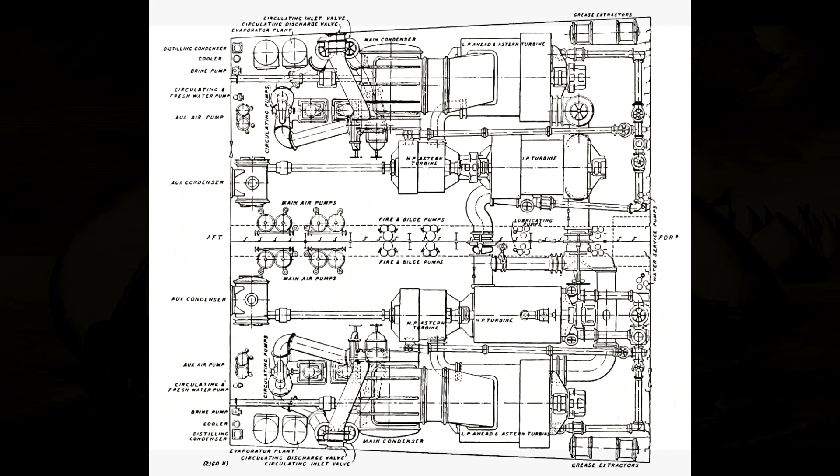So today we're going to go over some considerations you might want to keep in mind when designing your naval propulsion system. First, are you going to use steam at all? This depends on when you are designing your system, because if you're trying to design one in 1800, I have news for you, you're going to fail. It's sails all the way. However, if you're trying to do this around 1930, there are a few options on the table.

For example, you could use diesel, which doesn't involve creating steam. This brings us to our first conundrum, at least for the time period the channel covers. Diesel engines, when they exist, are more efficient. They will get you further for a given amount of fuel, but their energy density is less. If you have a certain square footage or volume to fill with some form of engine and you use a diesel system, the overall power output will be less than the equivalent steam propulsion system. So if you want speed, diesel's probably not the best bet, but if you really like range, it's probably a good idea.

However, you also have to factor in that fuel for steam propulsion systems, by the early 20th century, is available in all sorts of wonderful places. Diesel fuel in any great amount, not so much. So you might have to start thinking about taking on board some kind of fuel purification system, like the Deutschland class had. But of course that adds weight and takes up space. And if you want diesel and speed, you're going to have to devote a large proportion of your internal volume to propulsion systems. That may compromise, if you're designing a warship, the amount of armor, weaponry, supplies, crew, etc. that you might be able to fit on board.

But if your objective is purely to go a very long distance on minimal fuel, then sure, go with diesel. You could also go with a combined power plant. You could go with diesel on a central shaft, if you're the Germans, with 3 shafts, or diesel on 2 inner shafts if you're somewhat more sensible and have a 4-shaft system on your capital ships, with steam on the outboard shaft. This would theoretically give you the long-distance cruising capability of diesel and the high-speed steaming capability of steam, at the expense of a somewhat larger machinery plant than you might otherwise want.

And of course, you have to carry 2 kinds of fuel and have 2 separate kinds of engineers trained on 2 separate kinds of propulsion systems, which could be problematic. But ultimately it's all down to what you can afford and what your final objective is.

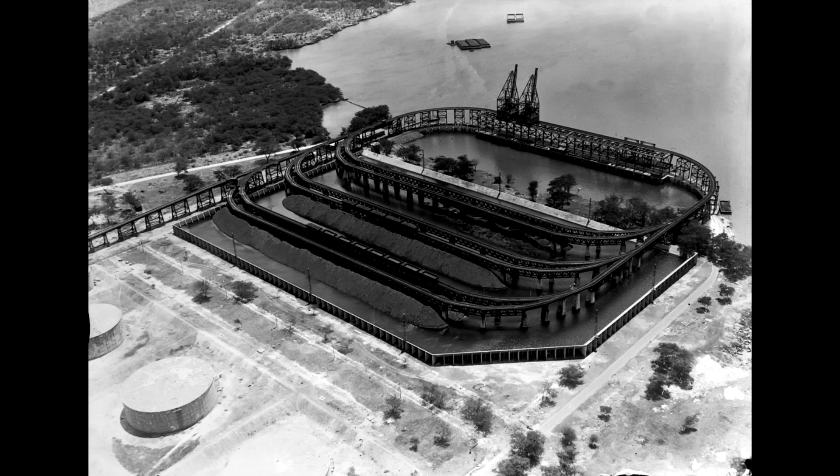Now, assuming you've chosen a pure steam propulsion system, or you're thinking about a partial steam propulsion system, you then have to think about what kind of fuel to use. If you're doing anything up to about the first decade of the 20th century, you're pretty much restricted to coal. So good luck shoveling.

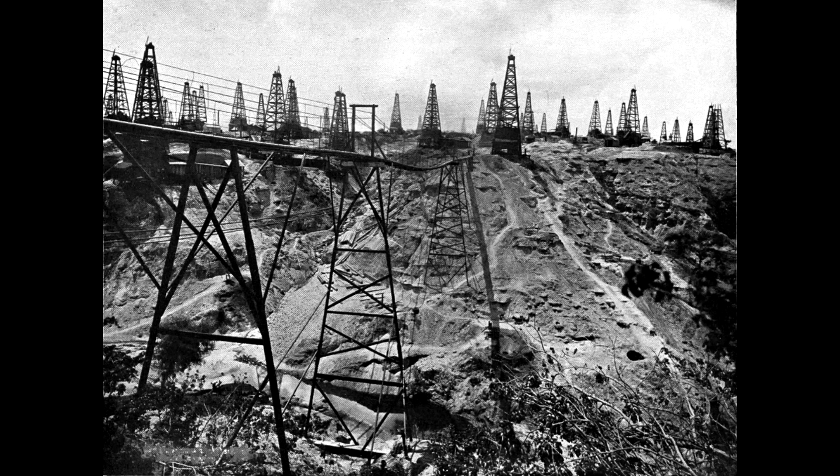However, once you get into the 20th century, you start to see the rise of mixed boilers. So you can have primarily coal, but spraying oil on there to help with burning, increasing power output. As you get into the 1910s and thereafter, you start to have more and more access to oil firing for your steam plant. Now, there are, believe it or not, some benefits to each system.

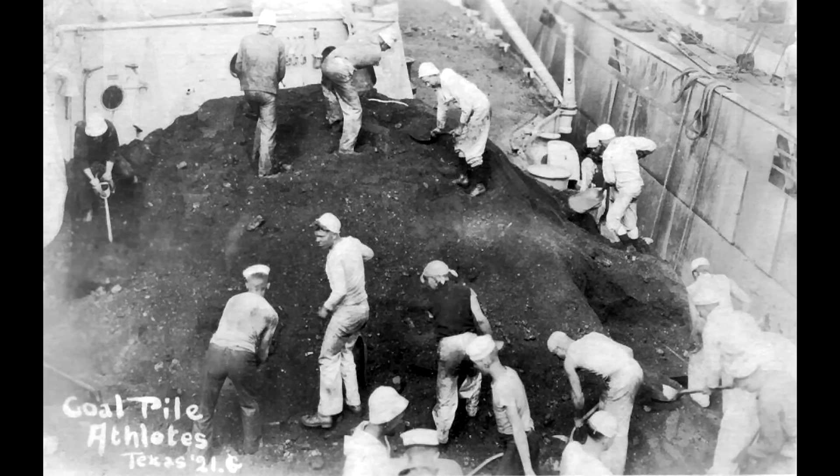Yes, pretty much everybody in various navies switched over to oil, but as the Japanese would find out in the late 30s and early 40s, oil does have one drawback. Coal, even if it's not particularly good coal, can usually be found in some way, shape, or form in most countries. Oil, not so much.

So that means you are going to be dependent on some kind of foreign overseas oil supply, unless you happen to be one of those very lucky countries that has naturally occurring oil fields, or your country is just so large that you will inevitably have some naturally occurring oil fields in it at some point. Or potentially you've gone out and nicked a bunch of other people's countries and they happen to have oil, but in those cases, you still have to get that oil back to your home country, which other nations might have something to say about.

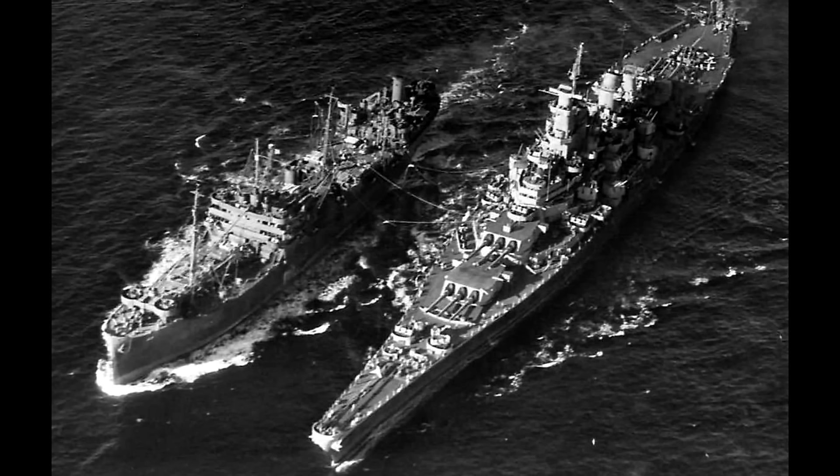But outside of the possibility of not actually having any fuel, oil is otherwise fantastic. It gives you more energy per unit of mass than coal does. It's much easier to refuel, much cleaner to refuel, which is a great boon to your crew. You don't need as many crew because you don't need stokers anymore. Although the rank is retained, the general idea of needing several hundred men to shovel large amounts of fuel into furnaces dies a death with oil propulsion.

And if you run out of oil in one of your fuel tanks, you just go, okay, well, I guess we're drawing oil from another fuel tank. Whereas if you run out of coal in one of your bunkers, it's a bit of a walk to another bunker. But of course, you have to trade that off against, well, first, the technological capabilities of your nation. Second, the potential security hazards of relying on oil from overseas, if that is how you're going to get your oil, which most people are going to.

And finally, depending on the ship that you are designing, given that oil is a little bit more expensive than coal, do you need all these performance boosts? If you're designing a particularly slow vessel that's not going to be expected to run at very high speeds for extremely long periods of time, then coal might be easier to access and cheaper. It's very rare that you would make such a decision, but if you happen to have local coal deposits and no local oil deposits or no easy access to oil from overseas, coal might be a solution for things like small escort ships.

But assuming that you've got past all of that, and let's assume you've gone with the most common choice for the 20s, 30s, and 40s, which would be an oil-fired steam system, you now get to choose what kind of engines are your lovely steam boilers going to power. Of course, in the mid to late 19th century, you have a choice of trunk engines, compound engines, and double compound engines, basically as they are invented. But again, we're going to be setting our question, apart from referencing what some of the earlier technologies were, mostly in the late 1910s and onwards, because that's where you have the widest variety of choice.

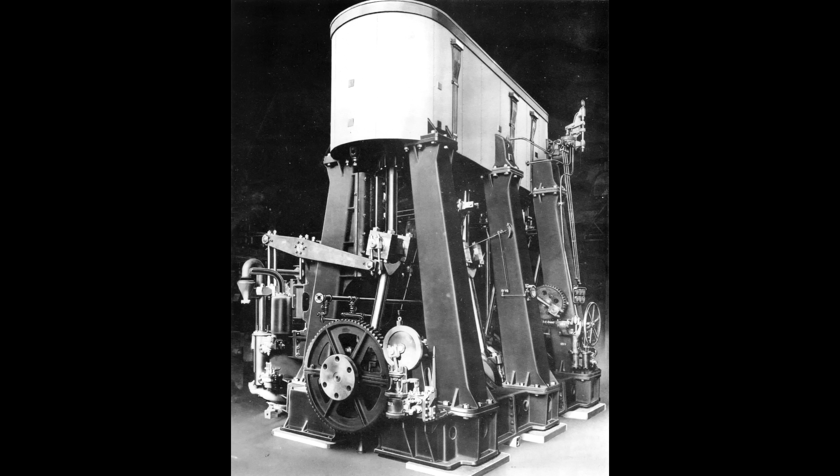Now, you could go old school and have vertical triple expansion engines. They are relatively easy to manufacture. They aren't particularly brilliant at running at exceptionally high speeds for very long, although the advent of forced lubrication does solve that issue somewhat. They are very big, and they are prone to generating a lot of vibration. But, as I said, they're cheap and easy to build, so if you have a throttle of some kind, whether it's some kind of industrial bottleneck or a lack of funding to build some of the more complicated engine systems, it might be worth a thought, especially if, again, you're building something that isn't expected to go particularly fast, like a convoy escort.

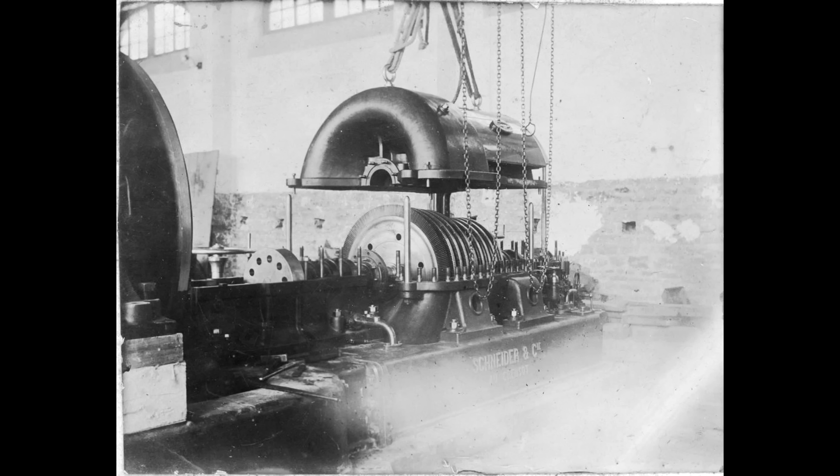Then you have the next step up from that, turbines. Turbines, somewhat easy to build, a little bit more difficult to build than a vertical triple expansion engine, but can still be mass manufactured. They're a lot more compact than vertical triple expansion engines. They cause nowhere near the amount of oil and steam and vibration spraying around everywhere that you get with vertical triple expansion engines, but they only tend to work particularly well at one speed setting, and as pure turbines, that speed setting is way faster than you really want to go, at least in terms of RPM on your screws. So, both efficient and inefficient at the same time.

And that, of course, brings us to a split in engine choices that occurred in the late 1910s and early 1920s, particularly in the US Navy, but occasionally elsewhere, geared turbines or turbo-electric drive.

With geared turbines, you obviate the problem that your turbine is going at several thousand RPM by sticking a monstrous set of gearing in to reduce your shaft rotation speed to tens or hundreds of RPM, which is something more in line for a propeller that doesn't want to die immediately of horrible cavitation.

This massively increases the efficiency and therefore range you can get out of a turbine propulsion plant, but ultimately the turbine still has a fixed speed which it is best at, and therefore there are still going to be speeds which you are less efficient at. You can solve that by having a variety of different turbines, which we will mention next, but even if you have a high-speed and a low-speed turbine, there are still going to be speeds in between where you're not quite as efficient as you could be.

Enter the turbo-electric drive. The turbo-electric drive is paradoxically more and less efficient than a geared turbine because it introduces another step. So you still have your boilers, you still have your turbines, but then instead of the energy going into a gearing system and then down to the propeller shafts, the rotational energy of the turbines is turned into electrical energy by means of generators. This electrical energy is then conducted to big motors, and the motors turn.

Now, dialing the amount of electricity that the motors receive is pretty easy and fast. You can put as much energy into reverse as you do into going ahead. And you have the multiple redundancy of, oh, well, that motor's burned out, I guess we'll just divert the electrical power to this other motor instead. A little bit more difficult to do with pure mechanical linkages.

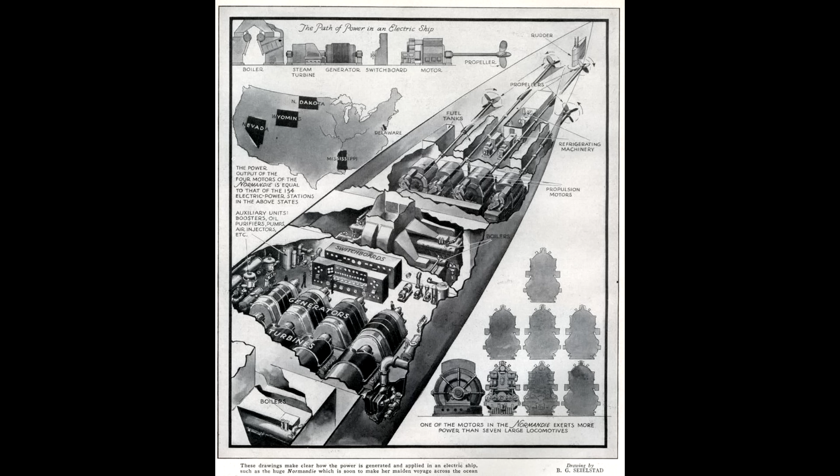But there are two drawbacks. Firstly, it's both more and less efficient. This is because you've introduced another step in the energy transfer process. And every time energy changes its state or is transferred from one place to another, it loses a little bit of its energy because there's no such thing as a perfect conductor, at least in the early 20th century. Who knows what they'll come up with in the future?

So for a given amount of energy put in at the boiler, the amount of energy that reaches the propeller shaft in a turbo-electric drive is going to be slightly less at its best efficiency than the best efficiency of a geared turbine. But the geared turbine only runs at that efficient state at one speed setting, as we've already discussed. Whereas with the turbo-electric drive, because you're not changing the speed of the turbine, you're just changing the amount of electricity going into the motors, your turbines can run all the time at their optimal efficiency rating.

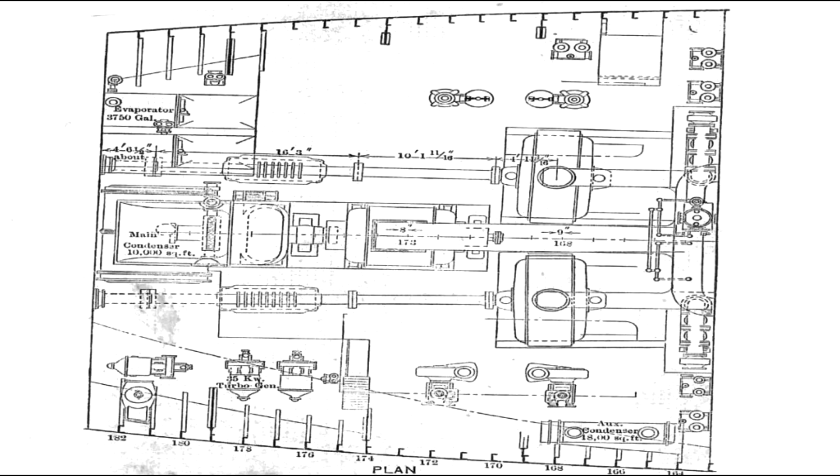If you want to use somewhat arbitrary scales, a geared turbine can run at 9 out of 10 efficiency at its optimal speed, but otherwise is running at 3, 4, 5 out of 10, whereas your turbo-electric drive is permanently running at 8 out of 10. So unless your ship is spending a huge amount of time at that 9 out of 10 setting on the turbine, the turbo-electric drive overall will probably save you a bit of money because it will save you a lot of fuel and potentially allow you to go a bit further.

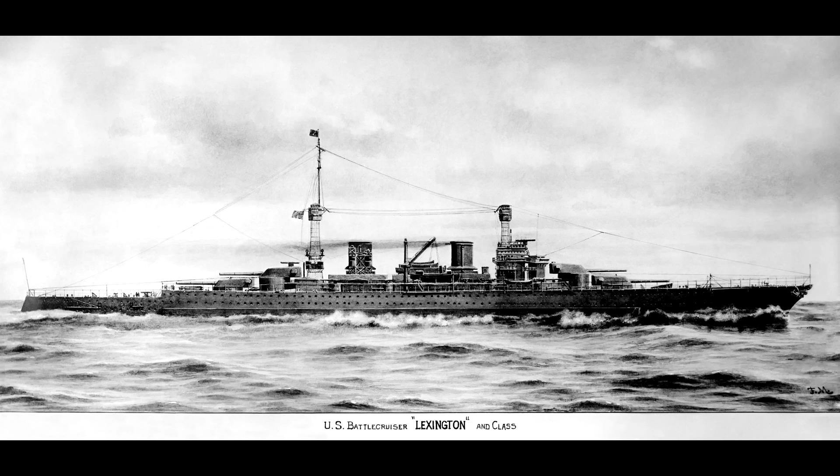But the other downside is that, again, because you've introduced another step, you've introduced these big generators and electric motors, the whole system takes up more volume and is heavier.

Now, if you're building a ship relatively unrestricted by treaty, then that probably doesn't matter too much because the weight and volume difference between a turbo-electric drive and the equivalent in geared turbines can most likely be made up by just making your hull slightly larger than it otherwise would be.

But when you are operating under treaty restrictions, like you should be doing if you're in the 1920s or 30s, or perhaps there's a budgetary restriction that wants you to limit the size of your hull for whatever reason, turbo-electric drives could cause a problem because every additional square foot and every additional kilo or pound that this system is taking is stuff that you can't put into guns and armor. So you do have to make a fairly big decision there.

But let's assume that you've done what most people do at the time and you've gone with geared turbines. Now we're looping back to what we mentioned a little bit earlier about having multiple types of turbine, because you can have high-pressure turbines, which use the steam coming directly from your boilers.

But then what happens to that steam? That steam normally would just go away to the condensers, but there's still a fair amount of energy in it. So most systems, by the time turbines really get established, will have a high-pressure turbine and a low-pressure turbine. As the name suggests, the low-pressure turbine will use the exhaust steam from the high-pressure turbine and get a little bit more energy out of it. As a result, the low-pressure turbine blades on their rotors, and the rotors themselves, have to be quite a bit bigger.

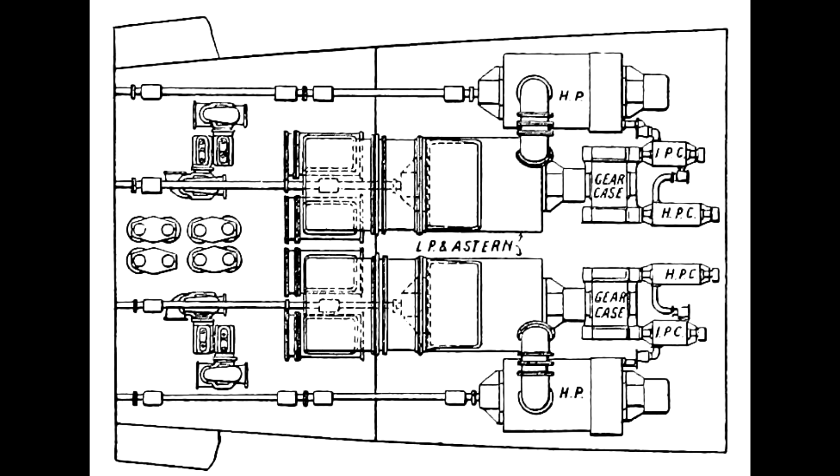That's not a very difficult choice, but then there's potentially a couple of extra turbines you might stick into the system. Now, why would you be sticking even more turbines in there, you might ask? Well, what are you going to do about going in reverse?

You could do a number of things with a steam propulsion system if you want to go in reverse. You could, at least in theory, bring your turbine to a complete stop and start feeding steam in the opposite way round to the way it was going before, which in theory should make the turbine blades spin the other way, and thus you go in reverse. This saves you from having to put anything else in if you want a reversing capability, but it does require you, at very minimum, to wind your turbines down to zero before you do anything, and ultimately that turbine was designed to go the other way, so there could be issues there.

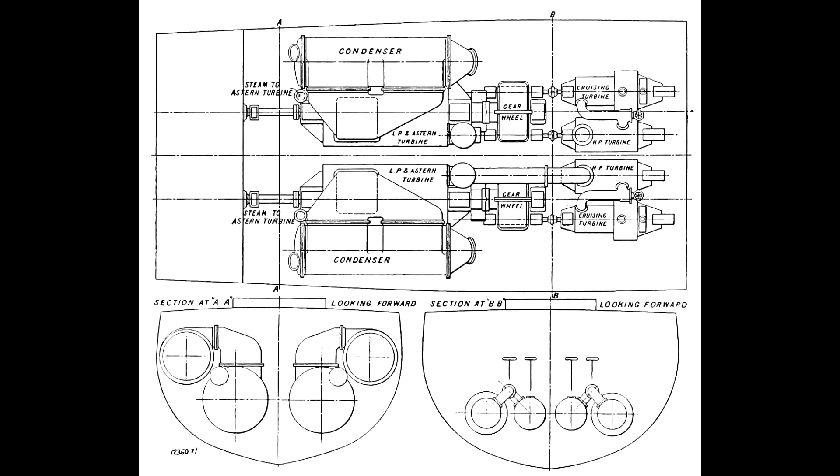But it's possible. Alternatively, you could just put in a straight-up reversing turbine, which will usually be the same as one of your other turbines, maybe a bit smaller because you might not need as much power, and it's just facing the other way. So you feed steam in the normal way, it spins around, but because it's facing the other way, the rotation is the opposite direction, and then you link that into your propeller shaft.

If you are using a geared turbine system, this is an excellent time to deploy your clutch, as found on HMS Belfast, because you then declutch the gears coming from your forward propulsion turbines, and then you can engage the reversing turbine. As you'll note with this label, don't do that when you're running at high speed, because grinding gears on a geared turbine set is a very, very expensive way of coming to a complete and utter stop.

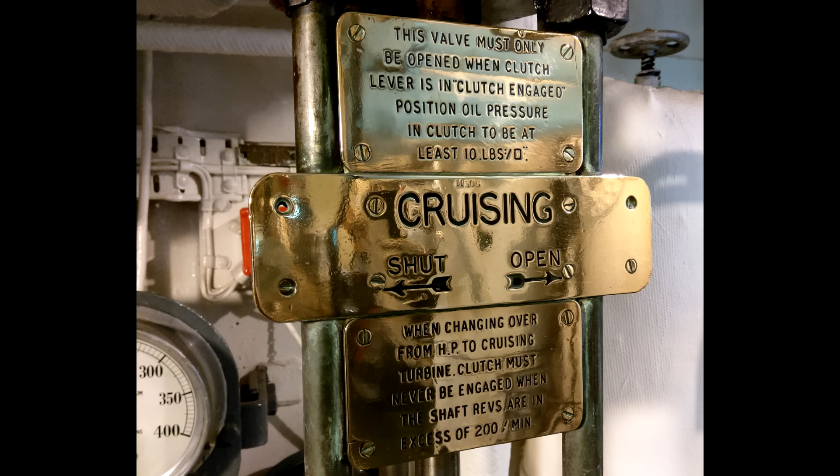So there you have a trade-off of additional weight and volume versus power and efficiency.

But there's another kind of turbine you might want to install, a cruising turbine, because of course you might not want the full power output of your main turbine set, but as we mentioned, running a turbine below its optimal spin settings does tend to result in very inefficient fuel usage. So you could just have a smaller cruise turbine. It will still run at a relatively high speed, but it's not going to generate anywhere near as much power because it's smaller, and therefore it's putting less energy into the gearing system, and the output at the other end is a much lower RPM.

Now, again, here you have a trade-off: it's more weight, it's more space, but in terms of propulsive efficiency, it may be more efficient. So do you take it up, or do you just run your bigger turbines at a lower speed and accept that inefficiency? A lot of this depends, obviously, on the weight and space you have available in the design, but also on how much you expect to be running at a lower speed, a higher speed, or an intermediate speed.

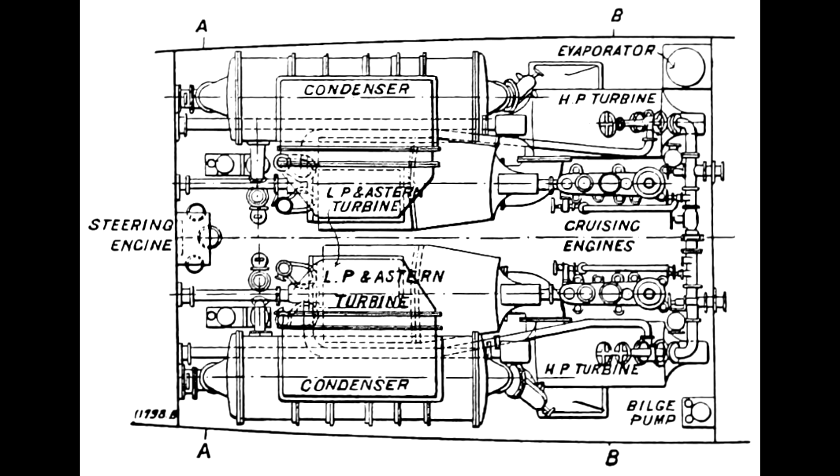If, for example, you can run at cruising speed on two shafts using your normal propulsion system, and then just fire up the outer two shafts to go at full speed, you probably don't need a cruising turbine. If, however, you intend to do an awful lot of cruising, but you want all your engines going, or it's just going to work out slightly more efficient, then you might want a cruising turbine. There are lots of decision points why you may or may not do this.

Now, we have mentioned having 3 or 4 shaft propulsion, and of course on small stuff like destroyers you might have 2, and on really small stuff like escorts you might only have 1.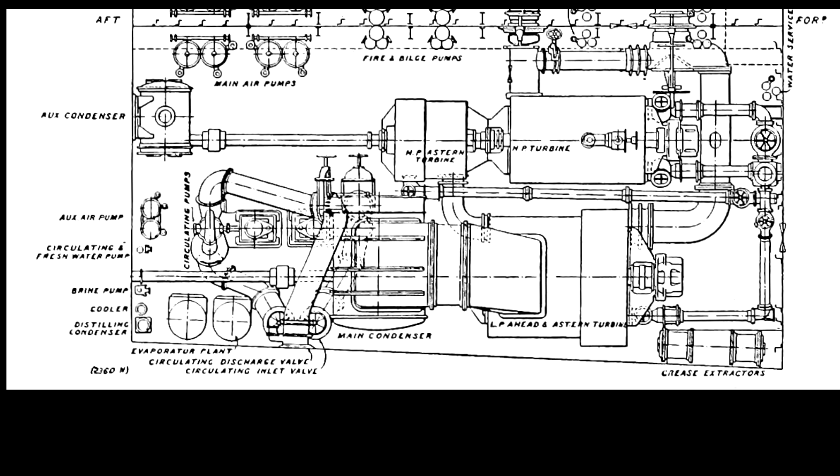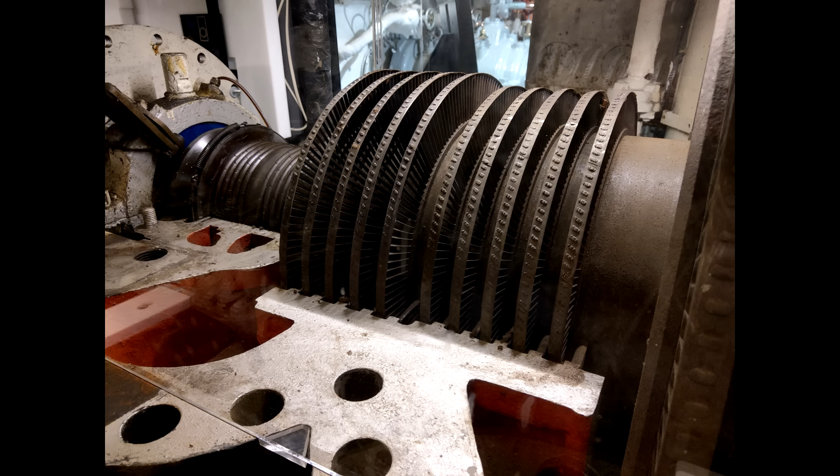You do have to usually make some kind of decision on the number of shafts you want, because more shafts means you need more turbines, more gear sets, and more boilers. If you go with, say for capital ships, 3 shafts, then you only need 3 sets of turbines and 3 sets of boilers, and each of those can therefore be somewhat larger. There are also structural considerations and tactical maneuvering considerations to having 3 or 4 shaft propulsion, but it is something to think about.

If, for example, your country is really good at building large steam propulsion systems, it might be better to go with fewer shafts and larger drive systems. If, however, you happen to be really good at making smaller units, but not quite as experienced at making ultra-large units, then having more shafts than average might be better.

But again, various other considerations can come into play, like how much power are you sending down these propeller shafts? Because unless you want an interesting piece of modern art, you do not want to be sending several 100,000 shaft horsepower down a single shaft on a battleship, no matter how tempting it might be.

And still looking at your steam turbine system, are you going to have any bypasses in there? Some steam turbine systems do not have these, others do. What is this system? Well, if your turbine, let's say your high pressure turbine, takes a hit, or strips a blade, or anything that otherwise renders it inoperable, that system is toast.

But you might have a cruise turbine, a low pressure turbine, and maybe even a reversing turbine in that engine set. If you have no bypasses, so the steam is purely coming into your high pressure system and then being distributed to everywhere else, or maybe through the cruise turbine and distributed everywhere else, and that cruise turbine has taken a hit, well, that entire engine system is down and out of action. You are getting nothing out of it. This isn't ideal, but you have saved some weight.

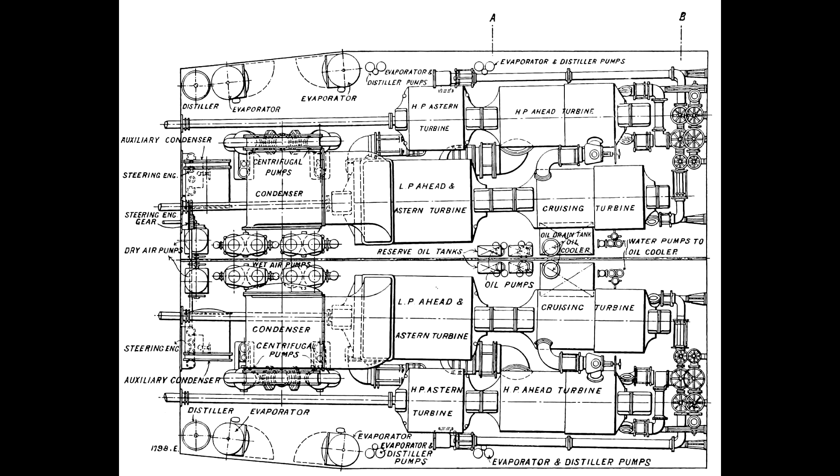On other systems, you will have a bypass or multiple bypasses where if you've lost your cruise or high-pressure turbine, you can close the steam input into that section and reroute it through this bypass pipe, pushing the steam into, say, the low-pressure turbine system. Now, is that as much power as you had before? No, but it's considerably more power than you would have if you shut down that shaft entirely.

You could even take the bypass system a level beyond and have steam bypasses that would perhaps allow you to divert steam from one boiler to another, because usually you'll pair sets of boilers with a particular propeller shaft and its associated turbines. But if you want the additional weight and space, you could have some kind of labyrinthine steam exchange that would allow you to move steam across various propulsion units.

This could be useful because, for example, if you take a bunch of hits, you could have lost your port outer engine, but your port outer boilers are still intact. A hit elsewhere might have knocked out your starboard inner boilers. At that point, you are down by two shafts, because in one, the engine's gone, and in the other, the boilers are gone.

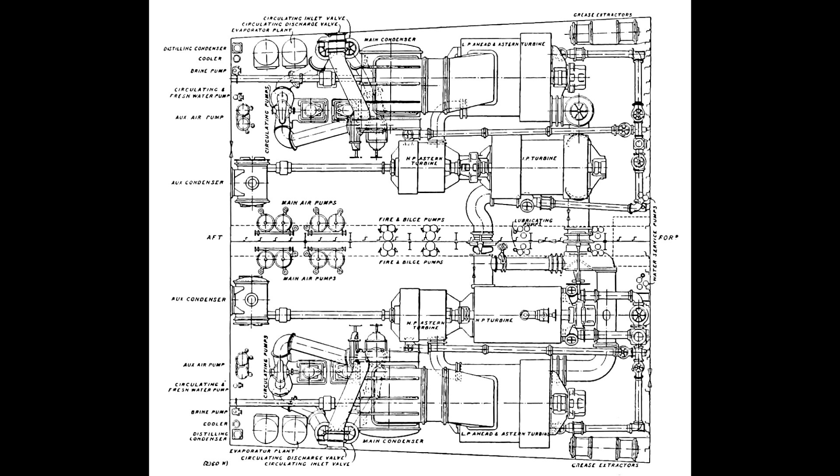But of course, as I said, this involves considerably more weight, space, expense, and potentially piercings in bulkheads. So it is a trade-off.

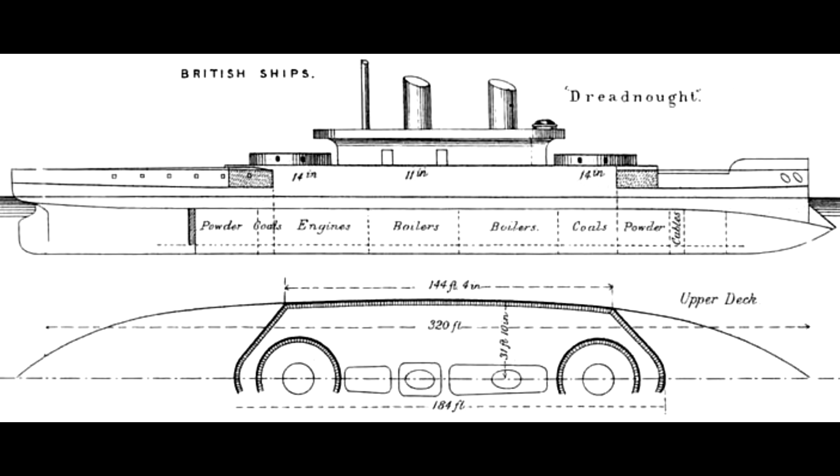And speaking of boilers and their engine sets, how are you going to lay them out? It might be very tempting, and indeed it is theoretically the most efficient, to say all the turbines are going in here and all the boilers are going over here. Nice, compact, easy to do. Except for one small problem: if you get hit in the boilers or hit in the engines, you've potentially lost propulsion completely, which is not a good thing.

Now, you can do the unit system. Technically speaking, the unit system divides up either a boiler or a section of boilers and the turbines of a particular power set for a single shaft, and puts these all in individual compartments. Then you replicate that over however many shafts you have.

And then you can also start moving things around. So you might have a turbine right aft on the port side, but then the inboard turbine might be considerably further forward, and the boilers can move around as well.

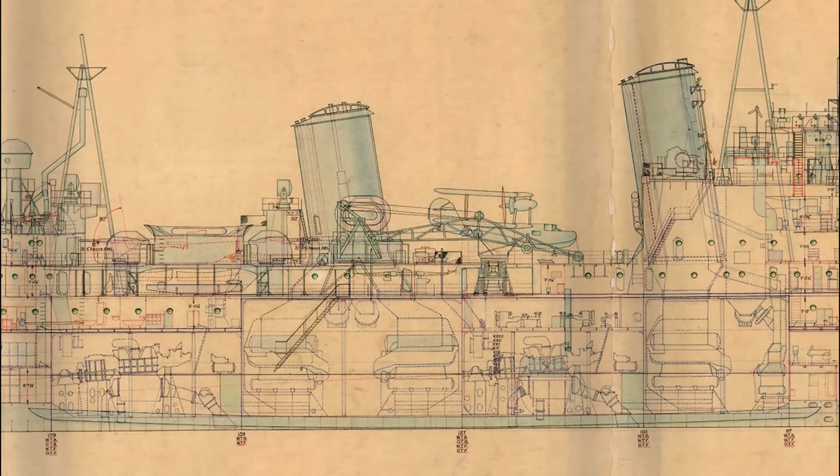Now, this has the advantage that the breach of any single compartment doesn't knock off your entire propulsion system. By moving the boilers and turbines around so they're not all in one block over there and one block over there, even if each section is divided by bulkheads, a particularly powerful blow still can't knock out all your boilers and all your turbines. It might knock out some, but there'll be others elsewhere, and particularly if you have bypasses, you can fairly easily keep going. The problem is that the unit system creates inefficiencies in terms of space layout and needs much more steam piping. So again, you are sacrificing weight and space for redundancy in this case.

There is also another way of doing the unit system, which technically isn't quite the unit system, but follows the same design principle: group up the boiler and turbines for a particular shaft and put them all in one box, then do that for however many shafts you've got. In the case of a four-shaft design, you'd have 4 big boxes containing your 4 main systems. That's used in some ships because it is slightly less weight and space efficient than just having all the boilers and all the turbines in their own 2 separate compartments.

But it is considerably more survivable than that, while not having quite the same weight and space penalty as a full unit system, in exchange for being slightly less survivable, because if you take a hit to one of those power boxes, that's pretty much that shaft dead. Whereas if you've divided the turbines and boilers into their own separate sections, you can, at least with bypasses, do a bit of cross-feed as we described earlier.

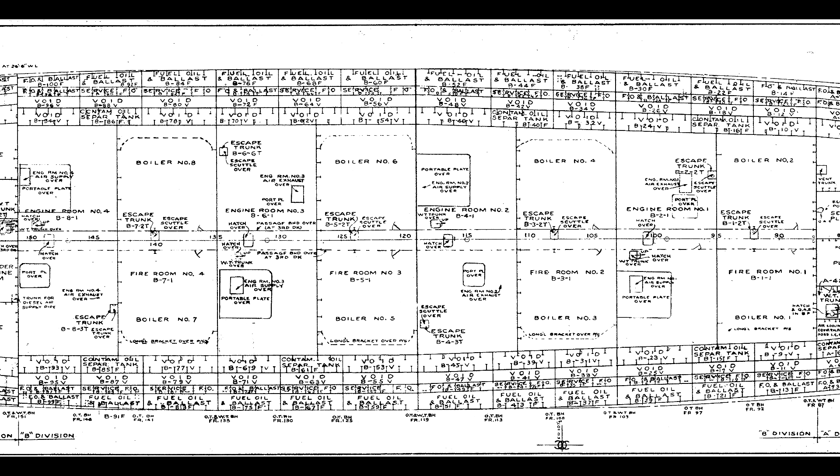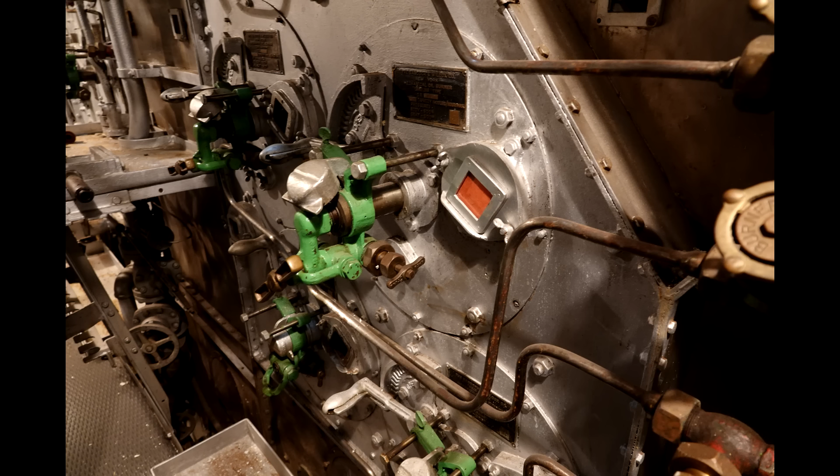And then we're on to our final two selections, at least for this video. Firstly, what pressure of boiler are you going to use? And what manner of boiler? Because certainly by the 1930s and 1940s, you have a choice between what were rated for the time as low pressure and high pressure boilers. Now, there's no fixed setting for what is low pressure and high pressure.

If you go back to the 1870s, low pressure would be measured in perhaps low double digits of PSI, and high pressure would be measured in high double digits or maybe very low triple digits of PSI. Whereas typically speaking, by World War II, most people are thinking roughly of low pressure meaning somewhere around 300 to 350 PSI, and high pressure somewhere in the region of 600 or more PSI.

So what do these things do? Well, higher pressure boilers technically will give you more power. So you might think, well, that's a very obvious decision then. But not quite perhaps so much, because high pressure boilers require more maintenance since there's more power going through them, therefore more wear and tear, and you need to maintain them more often. The need for maintenance is perhaps even more critical because a 600 psi boiler leak is not a good thing.

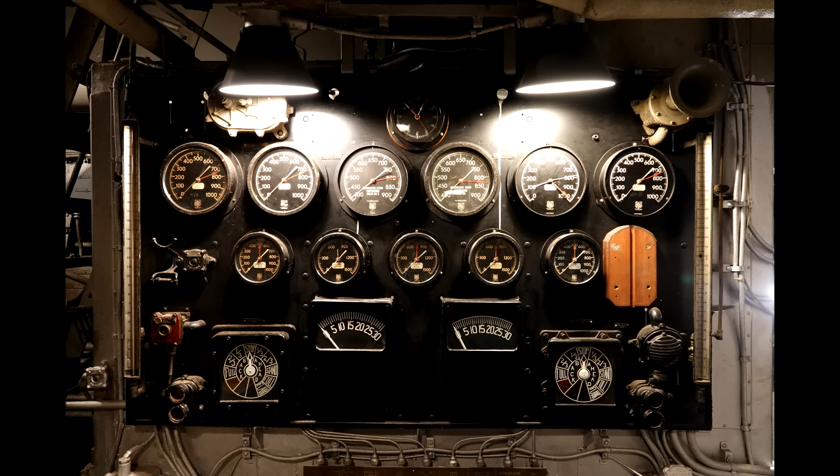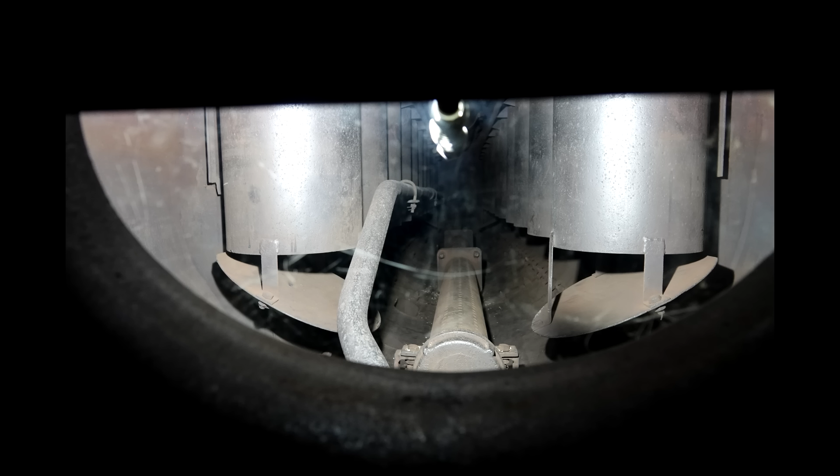A 300 psi boiler pressure leak is not a good thing either, but it's a considerably worse thing when it's 600 psi. And what this means is that a high pressure boiler might weigh a little bit more, it might be slightly less reliable, and you're going to need a somewhat larger crew to man it because of maintenance techs, and it's also going to potentially be devouring a bit more fuel.

A lower pressure system, while it might be slightly less efficient at turning oil into power, is less likely to break, needs a smaller engine crew, and the consequences of failure are slightly less catastrophic. And so now you're not just thinking about the weight and space requirements for the boiler itself, you're also thinking about the weight and space requirements for the manning of the engineering section as a whole.

Plus, higher and higher pressure boilers tend to be on the cutting edge of technology, so can your nation actually manufacture those high pressure boilers, and can they manufacture them in such a way that even with the need for higher maintenance requirements, they are at least somewhere on the curve?

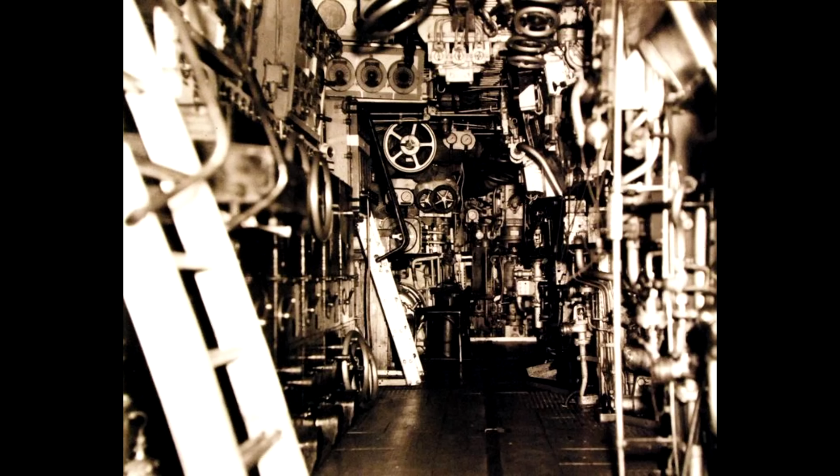Or is it a case of you can theoretically manufacture high pressure boilers, but they will be breaking down all the time unless you put 1,000,000,001 safety systems on them, which all have to be regulated and therefore increase your crew count. And if any one of several dozen things goes wrong, like something being damaged or someone being injured or killed in battle, the whole system can pack up and break down very, very quickly. At that point, the fact that you technically can doesn't necessarily mean that you should.

But if you can manage those additional hazards and requirements, then you can enjoy all the benefits of a high-pressure boiler. So it's up to you to make that choice.

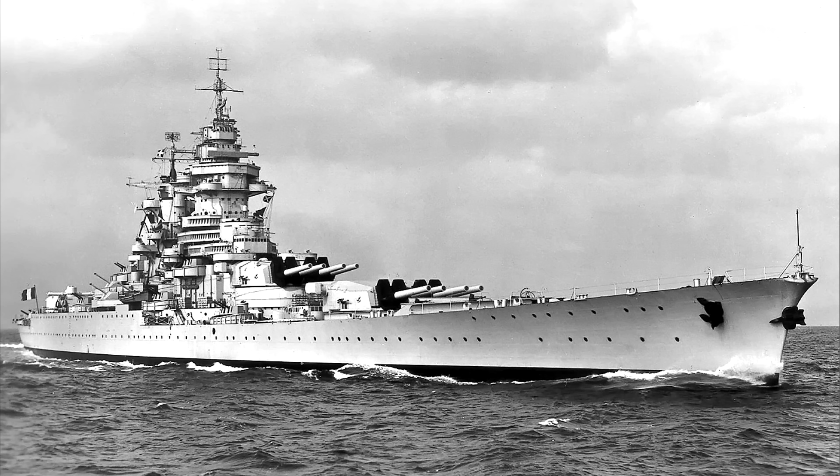The other thing to think about with boilers, at least if you are French in the late 30s and 40s, is are you going to go with forced circulation or natural circulation? Natural circulation boilers are the default. Pretty much everybody uses them. And this essentially works on: heat water, hot water rises, cold water moves to take its place, cold water gets hot.

Water is now hot, water rises, and then further up the system, hot water turns into steam, and hey, we have steam, fantastic. The only problem with this is that it means that the pipework in your boilers is governed by hard physical laws about how water and steam circulate. You can't make the turns too tight, you can't make everything too compact, otherwise you're going to end up with, at best, uneven pressure distribution and water hammer effects, and at worst the whole thing going kaboom.

Whereas with forced circulation boilers, you can massively reduce the weight and space requirements of your boilers by having essentially impellers, fans, propellers, whatever you want to call it, in there with your boiler water, and they can force the hot water and therefore subsequently steam to move around particularly tight corners and bends and all sorts of other things, which means that as long as they're running, your boilers on a per square or cubic foot basis will produce much, much more power than regular boilers.

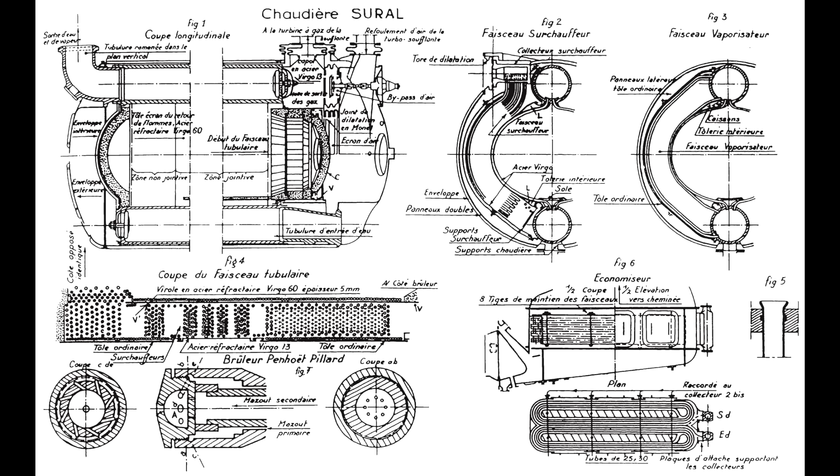And thus you can either make your machinery plant considerably smaller or keep it the same size and go considerably faster. The only downside of this is, of course, if that forced circulation machinery breaks down, that boiler is going to break down very quickly as well. So it adds an additional level of complexity and, of course, cost to your machinery manufacturing process. But it is certainly, again, something worth considering.

And then finally, the steam. You might think, hang on a minute, we've already talked about what we're going to do with the steam. We're going to put it through high-pressure turbines, then low-pressure turbines, possibly reversing or cruise turbines, and then it's going to get condensed and fed back into the system to be turned back into boiler feed water, which is then going to be heated up, and onward the circle of life goes. And yes, that is primarily what you're going to be doing with it.

However, ships don't just, at least in the 20th century, run purely on the engines going whir. There are all sorts of other things that need power: bilge pumps, lighting, electro-hydraulic motors, and a bewildering array of other things. Where are you providing this power?

Well, one option is that you can have separate dedicated generators, and these can run on diesel, or you could have your own little independent steam plant if you really want to. But, hey, you have this big energetic steam plant. One of the other options to prevent you having to carry other kinds of fuel, other kinds of generators, etc., might be to just tap a little bit of that steam off and run that steam through your other machinery, whether that be power generators, pumps, etc.

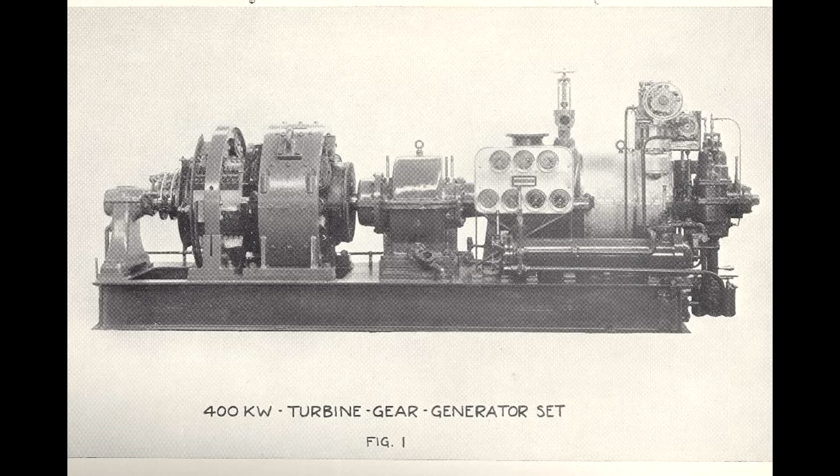Now, of course, this does have the advantage that you don't need to carry other kinds of fuel, or worry about multiple furnaces or internal combustion processes going on all across the ship. And any of these additional systems are going to have access to more power than they could ever dream of.

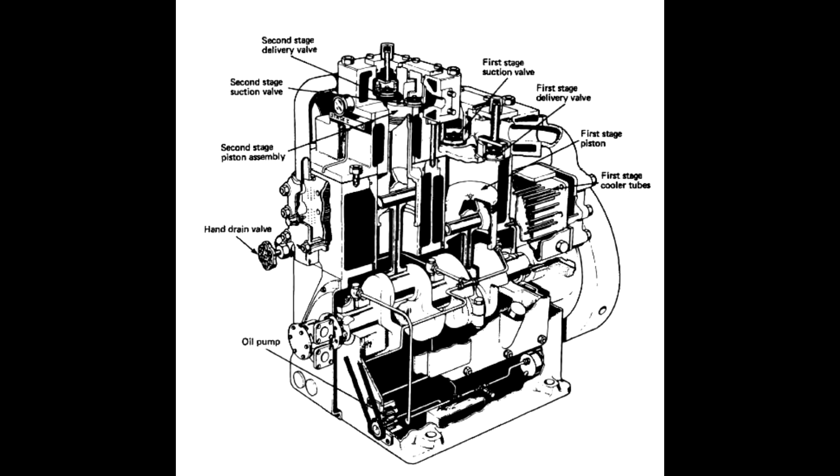The one downside to all of this is that you are drawing from your main power source for propulsion, which means, one, if you want everything to run at the same time and still achieve your design speed, your boilers have to be bigger than they would if used purely for drive purposes. And two, if anything happens to your boilers, you also lose an awful lot of that ancillary machinery. Usually when something big and impressive has happened to stop your boilers working, that's exactly when you want that ancillary machinery, like pumps, for example. So again, it's a trade-off between weight, cost, efficiency, and redundancy.

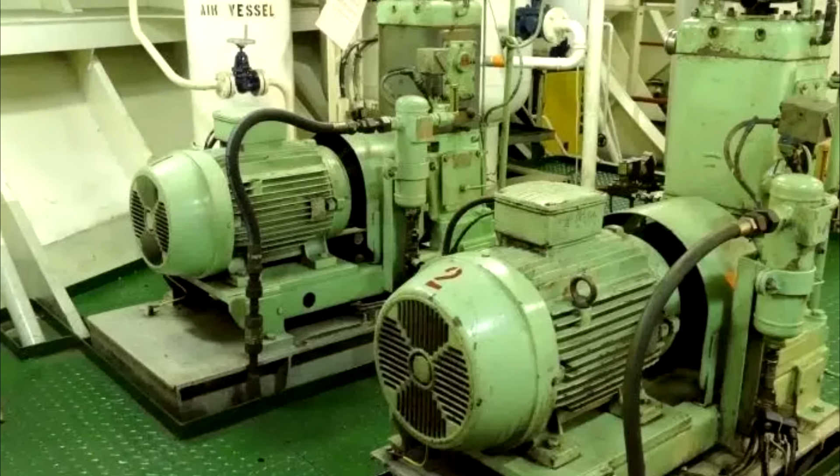There is, however, one slightly underappreciated element of running everything from power generation to heating on steam from your main boilers. As we've discussed in many videos before, your turbines, or vertical triple expansion engines, or whatever you're using, have a designed rated power, which is your nominal full power, but that's not their true full power. There's a reasonable margin above that you can run your engines at, it just massively foreshortens their lifespan, and the further up you go, the greater the chance of catastrophic failure. But there is potential for considerably more power output in the short term. Exactly how short that term is depends on how much power you shove through the thing and how much maintenance you've done.

Now, why does this matter when it comes to ancillary systems? Well, you need more steam power to up the speed of your turbines, and where do you get that steam? From the boilers. So if you run all your ancillary stuff off steam, your boilers are a little larger and they're discharging all this fresh steam to those systems. If you stop discharging that steam to those systems, suddenly you have a whole ton more steam you can shove into your engines to go much faster, meaning you can literally order 'all steam power to the engines' and off you go, motoring off into the distance.

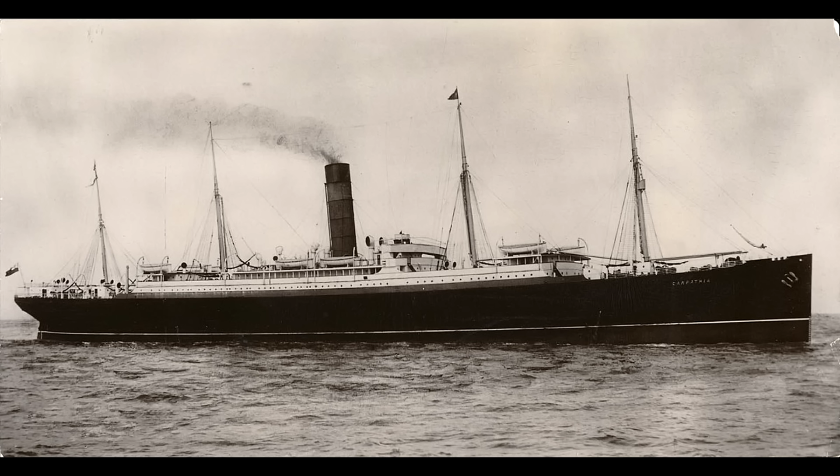This is exactly what the liner Carpathia did when she went to rescue the survivors of the Titanic, because she ran her heating, power, etc. all off systems connected to the main steam plant. When they realized they needed to get to Titanic as soon as possible, they bundled everybody into a few areas they decided to keep warm and lit, shut off power everywhere else, and diverted all that power to the engines, tearing off to rescue the survivors. So a good chunk of those people who lived through the Titanic disaster literally owe their lives to somebody standing up and saying 'all power to the engines,' which is a nice scene that doesn't really get shown in Titanic documentaries and films.

And on that note, I think we've covered a good chunk of the basic design considerations you might need to think about when designing a naval steam propulsion system.